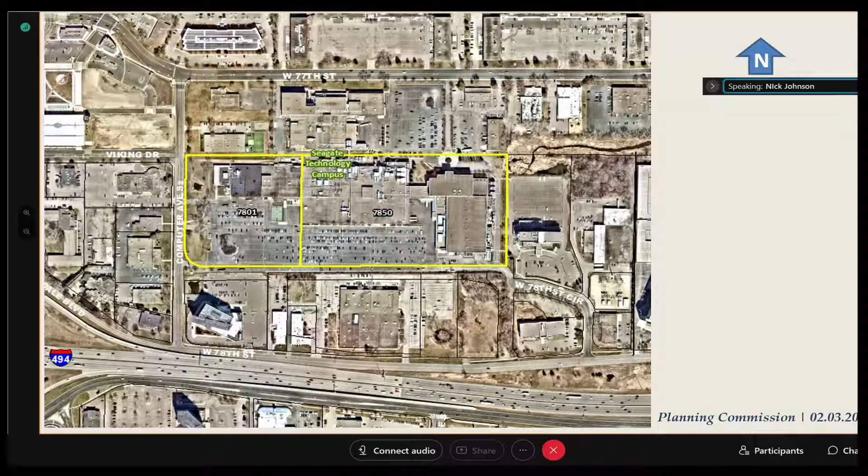For those unfamiliar with the Seagate campus, it's located just east of Highway 100 and north of 494, in that sliver of Bloomington that abuts Edina. In fact, the Seagate facility is partially within the jurisdiction of Bloomington, and the north part of the facility is in the jurisdiction of Edina. So that always presents an interesting, unique aspect to this project, or to this campus.

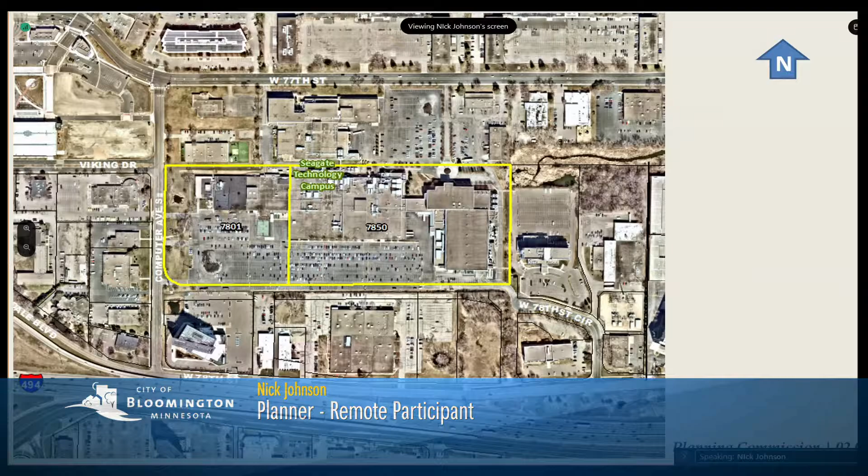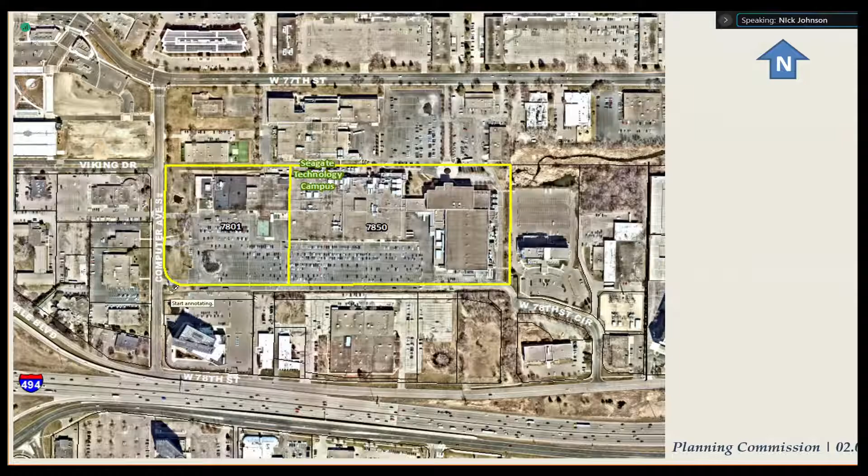Generally speaking, the access and all of the main transportation that serves this campus would remain the same. There is one thing I want to point out: a partially improved right-of-way that stretches from West 78th Street Circle over to Computer Avenue, which we'll talk about more. Generally speaking, the uses in this area are a mix of office, and we just had the high density motor vehicle sales facility in this area, so you're familiar with the area from that recent application.

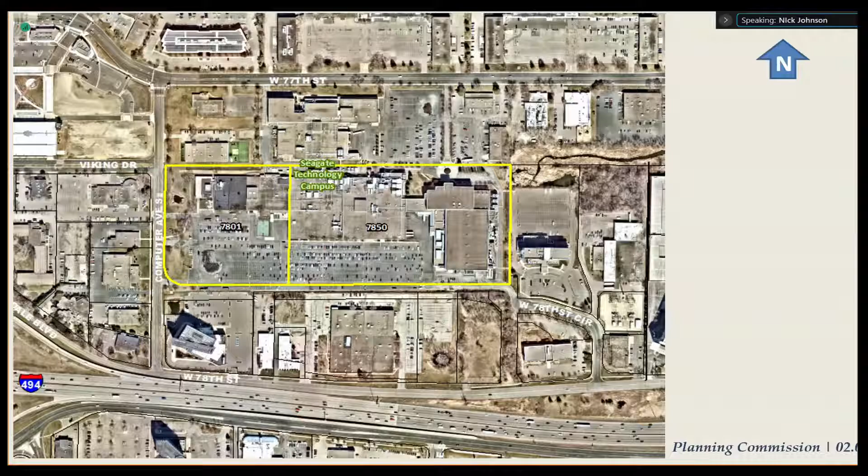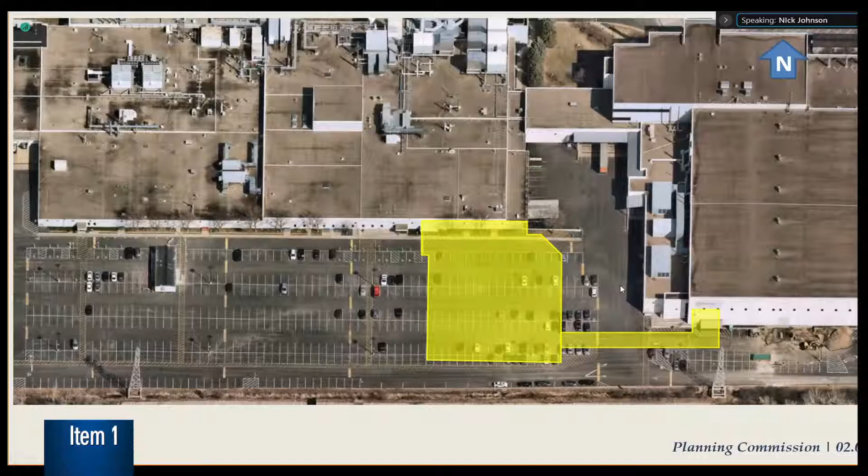This gets an oblique image here, closer into the campus, to give you a flavor. It's a mix of 1-story and 2-story buildings in this area. The shaded yellow area is where they would remove surface parking in order to install this building addition, and you see the skyway connection over to the east. Underneath here is a truck dock or truck court where they do delivery of various materials and shipping, and they would still allow access to that via the Skyway.

Here's the site plan before you. As mentioned, access to the facilities is primarily served to the west, out to Computer Avenue. I highlighted the building addition in green there. Some of the other associated site improvements include lighting and landscaping, and some of the typical things we would see with development.

In the orange areas, those are areas of either existing parking or modified parking, or in the case of this parking on the east side, new parking. As part of this project, they are installing some new parking but modifying existing parking in order to install underground stormwater management facilities on the west side of the campus. Their existing surface lot doesn't have parking islands and a few other things, so any area that they touch, they would bring up to code with respect to parking islands and those types of things.

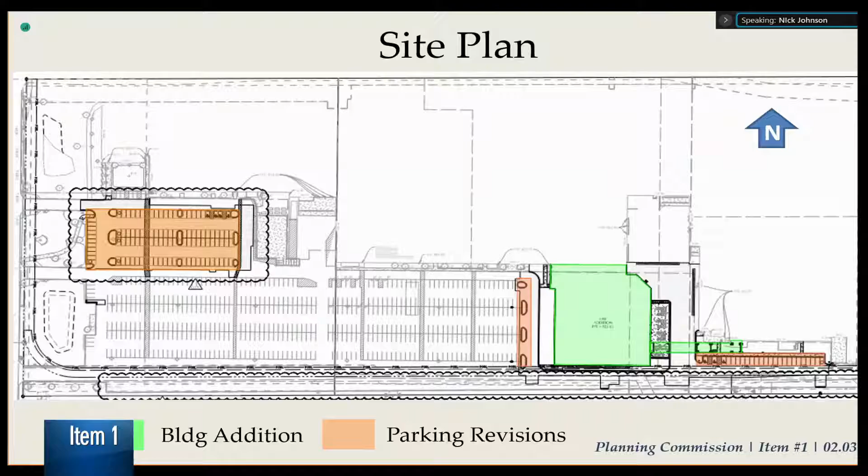A couple other things I'll note about the staff report quickly. The addition meets all of our setback requirements in the IT zoning district. They are requesting a modest deviation for stairs and stoops on the south side of the building. There are allowances for stairs and stoops to encroach into setback areas, but not within landscape yards, so I want to point out that modest PD flexibility they're requesting just on the south side of the building for stairs and landings.

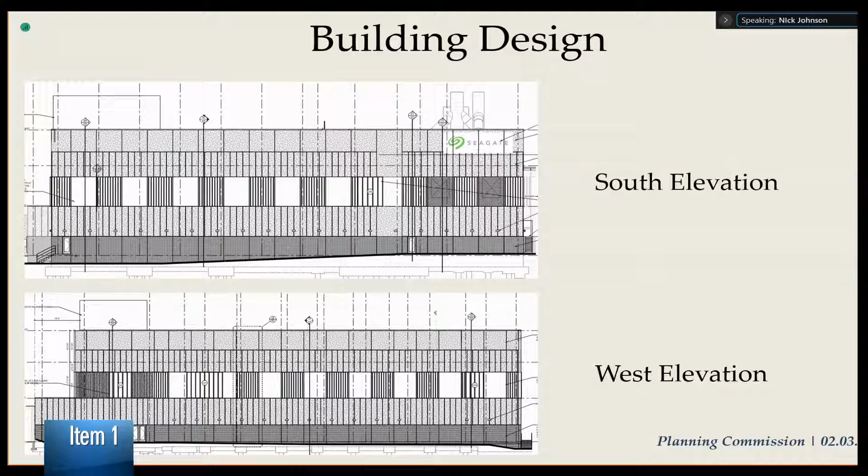In terms of what the building would look like, it's intended to match or mirror other portions of the campus. They've got glass and architectural concrete that's integral in color, kind of an etched or sandblasted type finish, and then some metal panels utilized at different portions of the building as well.

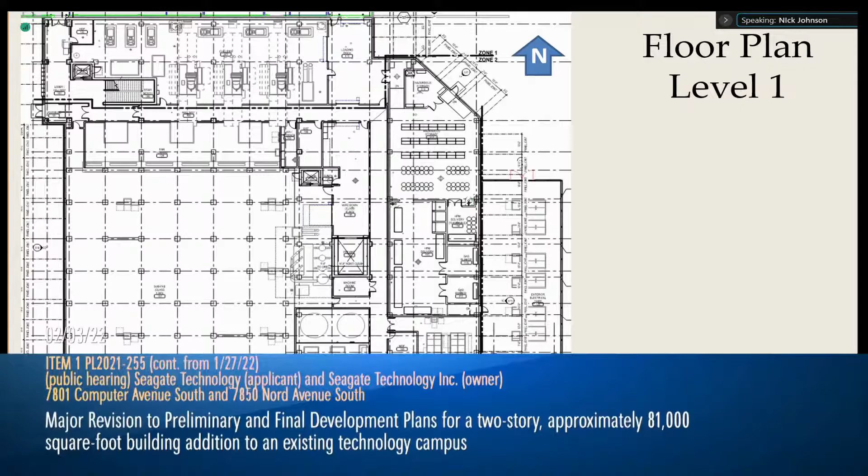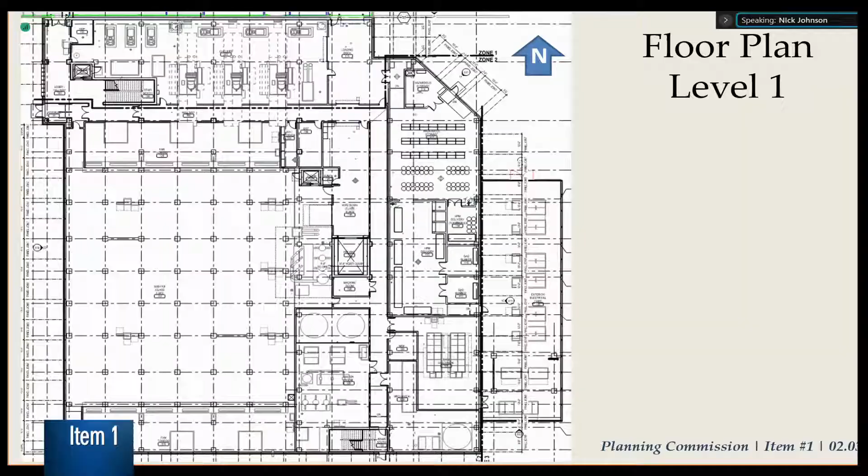Seagate is not a typical industrial or manufacturing use - it's a high-tech manufacturer in terms of chips and other things, so they have a lot of unoccupied space within this building. There's a substantial amount of mechanical, chiller, and air ventilation areas and equipment that creates a lot of dead space. That's something we've seen in other similar campuses - we have a few other comparable type uses in Bloomington over in the South Loop, and this is very similar to those facilities, which have lower occupancy than a typical manufacturing use. So that gives you a flavor of the first floor.

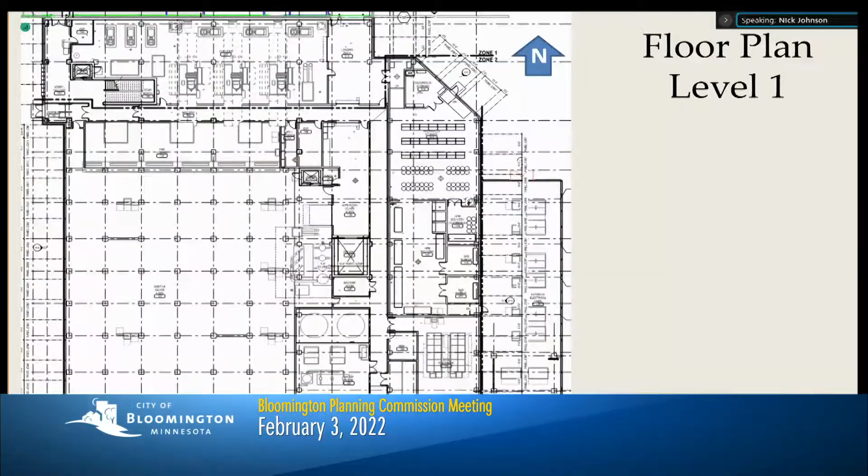The second floor, the area that's hatched on the left in the building addition, is actually the fabrication area where the fabrication activities would take place. But again, you have a lot of mechanical areas and a locker room. The fabrication area has to be a completely clean and controlled environment. On the right side of the slide, you see the Skyway connection - they actually have clean and dirty corridors, as they refer to them, so you can navigate in between controlled environments in other parts of the building.

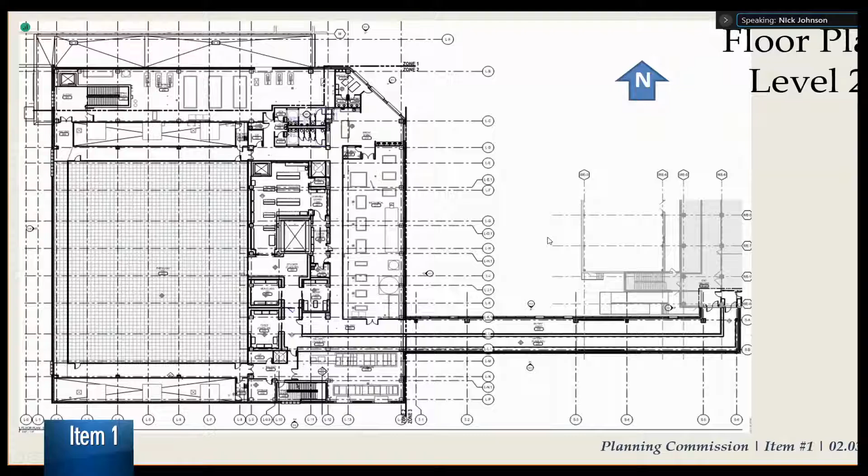I just want to point some of that out, and we'll talk about how that relates to the request as it pertains to parking. Let's talk about it right now.

The city code - first of all, on the basis that this facility is partially in Bloomington and partially in Edina, we had to work with the applicant to identify all the parking requirements in the jurisdiction of Edina. So they did go about that, and we verified those numbers. The calculations in the table I'll bring up on the next slide actually reflect both the parking requirements of the city of Edina and the city of Bloomington, getting us to an overall parking requirement.

They're proposing to provide around 1,400 some parking stalls, with consideration of 170 net proof of parking stalls. Along the eastern boundary of the campus, they're showing surface parking all along that drive aisle, and in addition they're showing expansions of parking in their existing surface parking lot south of the building through proof of parking as well. There are a few miscellaneous proof of parking areas also shown throughout the campus, so it's important to identify that they have a substantial amount of proof of parking that they're proposing to record against their property.

As long as I'm on this slide, I'll also point out that there's currently 93 parking stalls within that partial right-of-way on the south side of the campus.

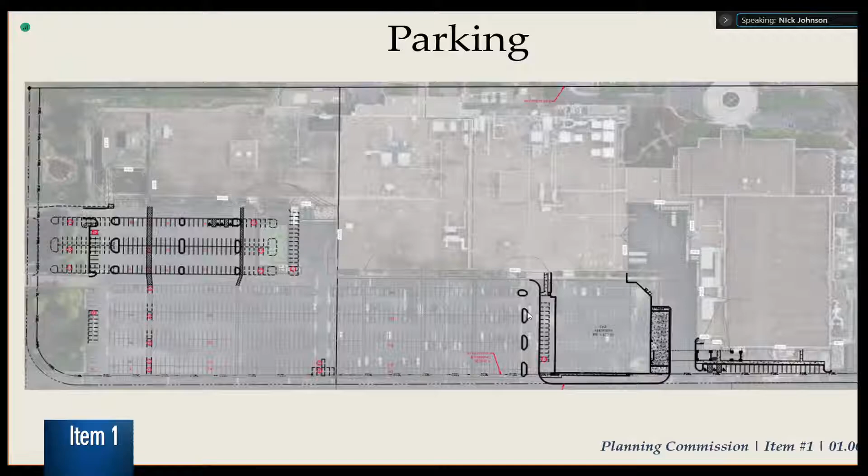That being said, this backup parking supply, while it can't count toward Seagate's formal parking supply for purposes of development approvals, is a consideration for how the city looks at requests for flexibility, or what the actual raw parking supply is that serves this campus.

Getting to the compliance table, you can see in combination with the 170 proof of parking stalls and the actual parking that's at the campus today, they would be requesting a 9.3% deviation from the city's parking requirement.

Staff is supportive of that for a couple of reasons. One, I mentioned the backup parking supply in the right-of-way that's likely to remain for an extended period, and has the potential to remain for a very long period. But the most important factor has to do with our experience with comparable facilities in the community — this facility has significant mechanical, air ventilation, and unoccupied spaces, as I mentioned before. So it's not a typical manufacturing use in that regard.

It also has a lower employee count relative to all of those spaces than a typical manufacturing use. For example, in the Seagate materials, they mentioned they'd have 45 employees per shift in the new building addition. If this were a typical manufacturing use, according to Bloomington's gross parking requirements, this new space would require 120 parking spaces for an addition that's staffed by 45 employees per shift. That gives you an idea of how the city's gross parking requirements don't mirror well this unique facility.

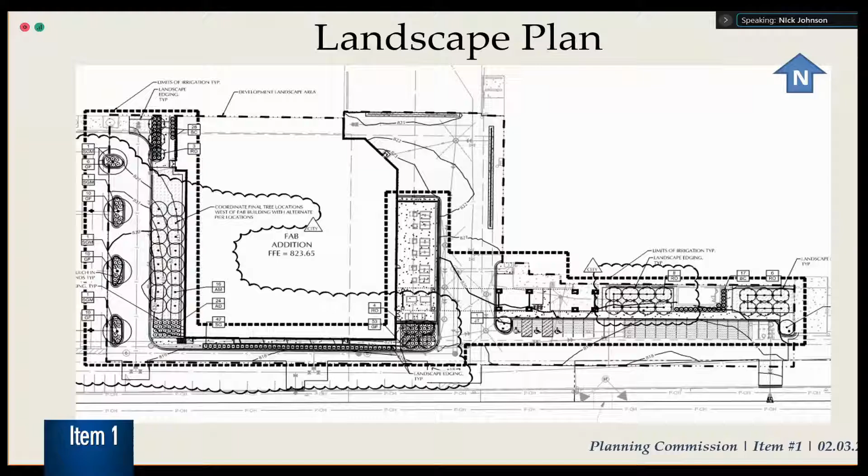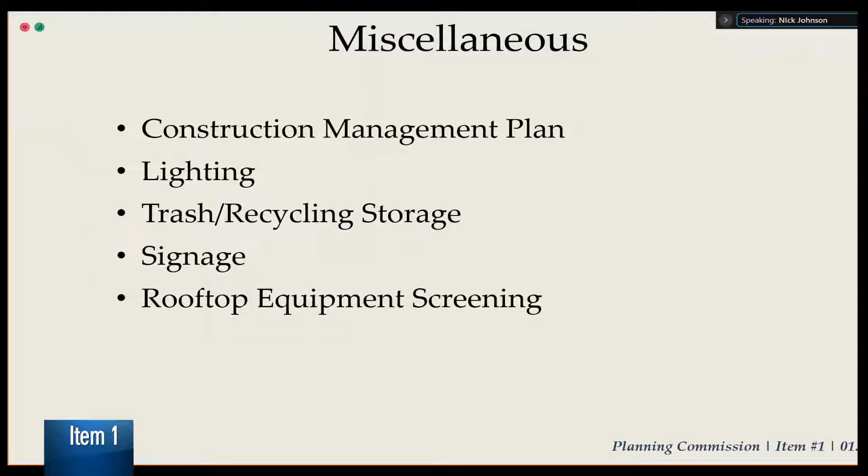Those things do need to be screened. We usually touch on that with the landscaping. There are some other miscellaneous things that have to be resolved as part of that application, and staff has added conditions of approval that address all these things. Hopefully it's straightforward. If there's any questions about a specific thing, I'm happy to return to it. But other than that, we have not received any public correspondence about this application, just to note that for the record. Staff is recommending approval, and I believe Seagate's staff, as well as their architect and engineer, are also available for questions.

All right, thank you, Mr. Johnson. Commissioners, any questions for Mr. Johnson on this application? Not seeing any right off the bat. Doesn't mean we can't ask later.

Mr. Markegard, is the applicant online? Yes, Mr. Chair, we have Mr. Leppert and his team as well. Mr. Leppert, are you there? Yes, Martin Leppert, Facilities Engineering Manager for Seagate. Would you like to address the Planning Commission in any way on the application? No, I have nothing to add. I think Nick did a great job explaining it.

All right, Commission members, anything to ask of Mr. Leppert? I'm not seeing anything for you now, Mr. Leppert. Appreciate you being available for any questions we may have. Thank you. At this point, commission members will go ahead and continue the public hearing on this item.

Mr. Markegard, is there anybody online that would like to speak to this item? Sure, Mr. Chair, let's check in with Mr. Pease and see if anybody has called in. Mr. Pease, do you have anybody on the line? Mr. Pease, can you hear us? I've got a text, he says no callers online. Okay, all right, and just to verify, anybody in the room that would like to speak to that item?

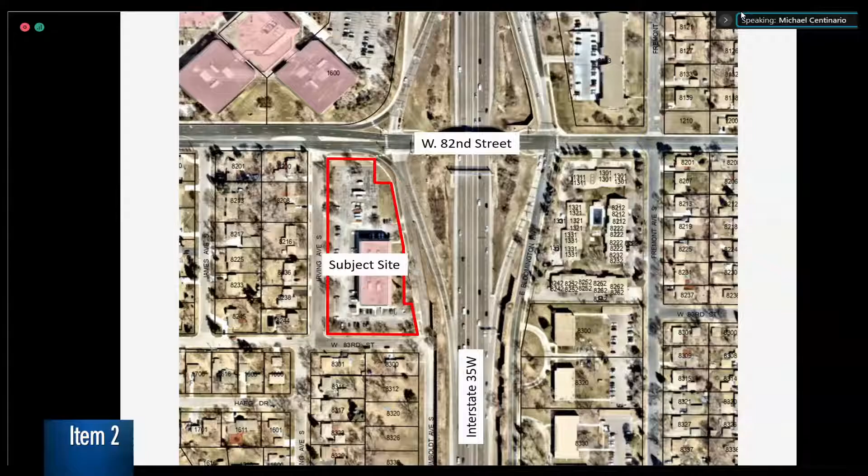A couple images of the existing conditions: the office building is about 50 years old, built in 1972, a 3-story office building with one level of structured parking beneath. It's largely surrounded by surface parking to the north, west, and south. I consider it fairly typical of this era of office development. This is an image from West 82nd Street looking south towards the building, showing its relationship to the interstate. Humboldt Avenue is the local street straight ahead in the image, and the on-ramp is to the left.

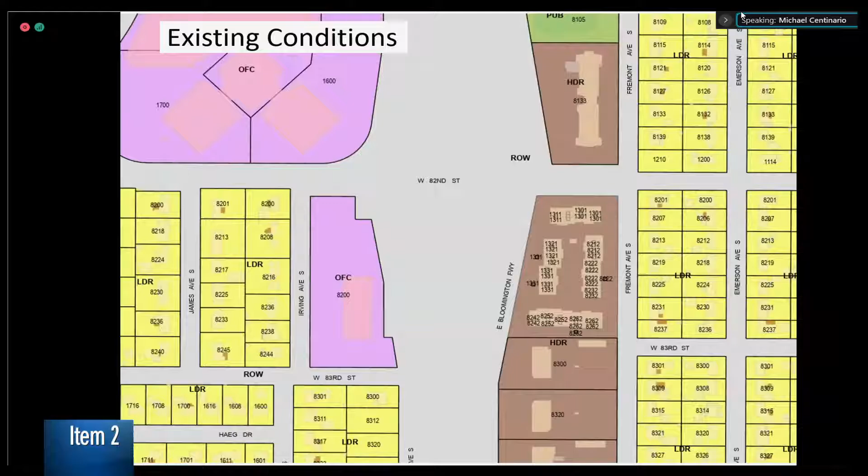The existing land use designation is office, very much in keeping with an office use. But to accommodate a multifamily or high density multifamily development, that would need to be changed to high density residential. You don't have to look very far to find high density residential designations — just on the east side of the interstate there are high density residential properties, some condos directly to the east, and apartment development to the north and south. So included in your packet is the re-guiding to high density residential.

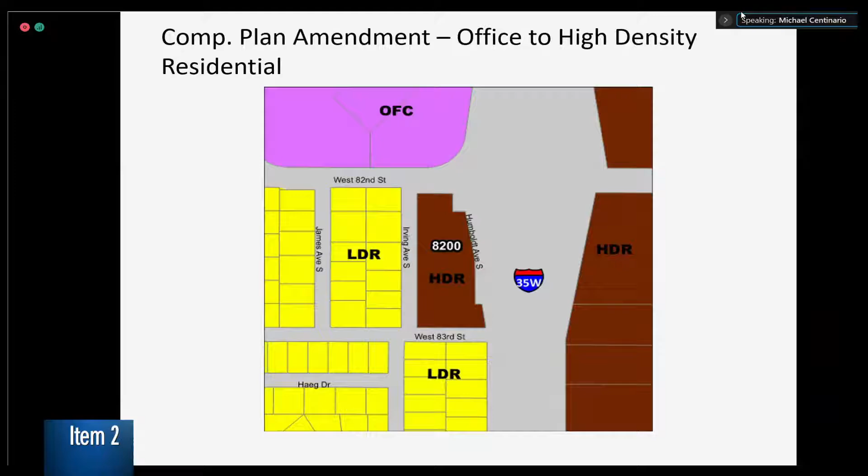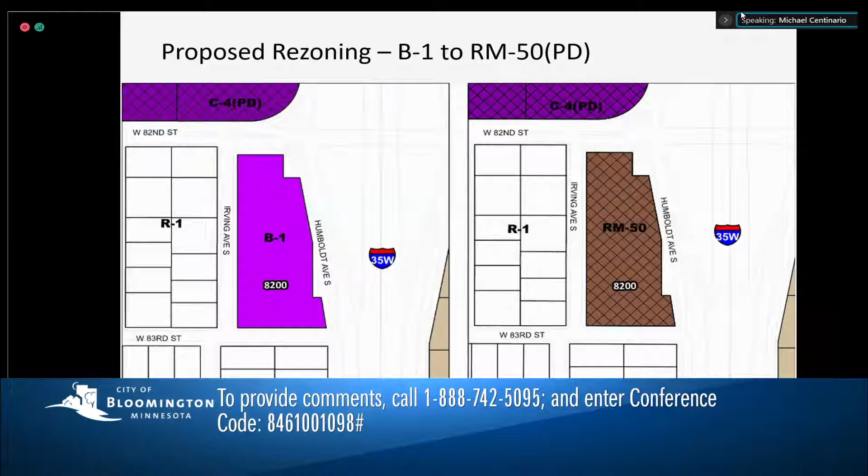Along with the guidance change, there would be a rezoning, and staff are supportive of the comprehensive plan amendment and the rezoning. We feel this meets the policy objectives outlined in the comprehensive plan and detailed in the staff report. Although this site isn't strictly within the Penn American District Plan, it's right across the street from that boundary, which creates an opportunity for folks to use transit access to the Orange Line — it's within walking distance to those stations. That's a factor in considering the rezoning and land use designation change.

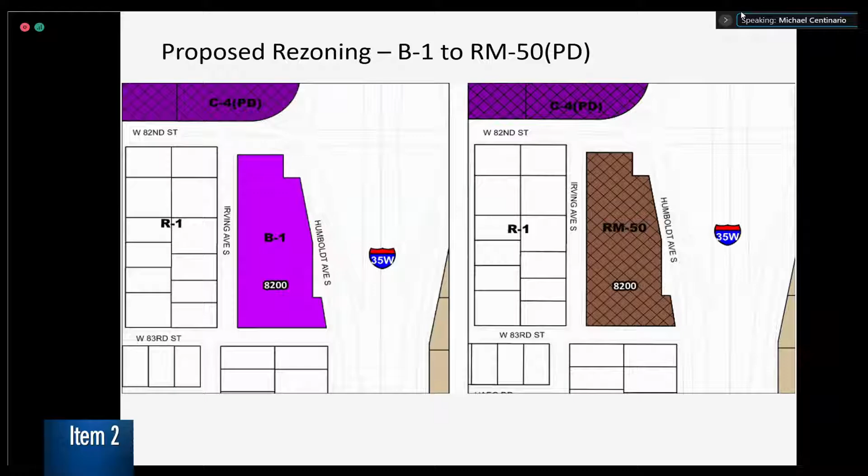Going to the site plan: 149 units, with a unit mix pretty typical for what we see. The majority are studio alcoves or one bedrooms, a good chunk of 2-bedroom units, and then 7 3-bedroom units, a smaller proportion.

The affordable housing ordinance, or opportunity housing ordinance, is applicable here, so there is an affordability requirement: 9% of units affordable to those earning up to 60% of area median income. The applicant is proposing a higher level of affordability — 14 units at 50% area median income. They are seeking tax increment financing through a separate process, and the level of affordability might evolve, as the applicant may seek a different tax increment financing mechanism and offer additional affordability. I don't believe this will be the last time the Planning Commission reviews this project in some form, but what's being presented tonight exceeds the OHO requirements as outlined in City Code.

With redevelopment, there is very often some flexibility requested by the applicant to fit a modern development on a not-so-modern site. This site is particularly difficult because it's surrounded by public right-of-way on all 4 sides, and our zoning setback requirements are usually fairly significant along streets. In order to have the density required to make this project work financially, they are proposing to locate the building closer to Irving Avenue than City Code would allow.

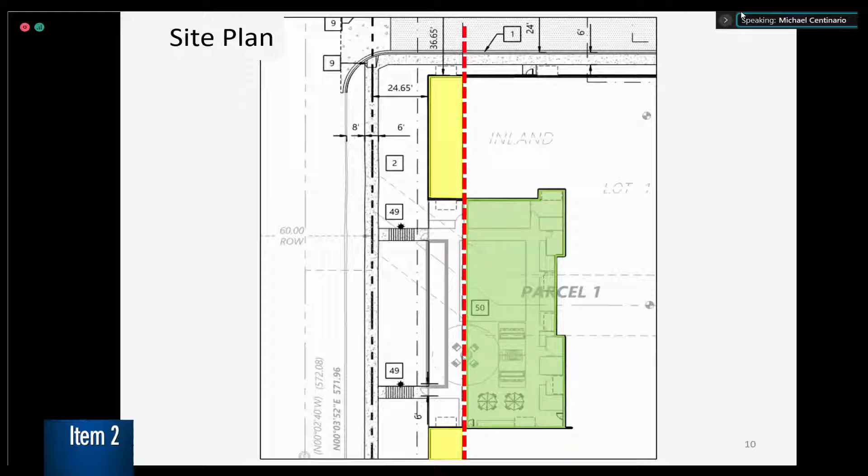One reason there was a bit of a delay in bringing this application before you is, again, right-of-way on all 4 sides, and there is some grade between this site and Interstate 35W to the east. So some retaining structures would be required to allow for surface parking. The retaining wall we felt needed to be adjusted to ensure there weren't impacts to MnDOT right of way, which would certainly lengthen the review process and may not be approvable, frankly.

So the applicant adjusted their plans. We wanted to ensure the retaining wall was no greater than 4 feet, because there are different standards. Once it gets above 4 feet, it's required to meet structure setbacks, and again, that's 40 feet from the property line. So that's a pretty significant deviation.

This retaining wall, even though it does not exceed 4 feet, still requires a deviation because there is a 10-foot setback even for a low retaining wall. But frankly, some retaining wall is necessary — it's either have a retaining wall or reduce the surface parking substantially, which may not work for the development overall. So again, we are supportive, and appreciate the applicant's adjustments based on staff's comments.

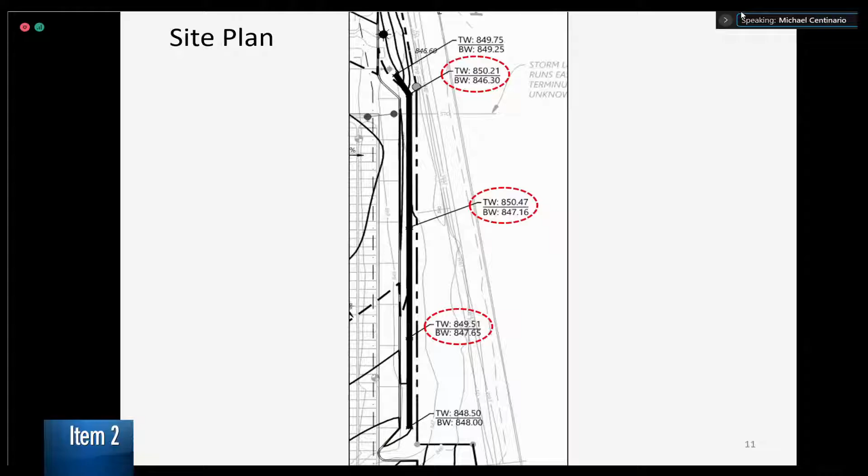Again, once you move one lever, something else changes — when the applicant was adjusting the retaining wall and the parking lot, they narrowed the sidewalk width a little bit. So one adjustment that would be a code requirement, and we are suggesting has to take place, is to maintain a minimum of 5 feet clear for a sidewalk. You can see a 6-foot dimension there. So you might ask, well, why does it need to change?

We want all parking stalls along sidewalks to account for vehicle overhang, and the standard we use is 2 feet. So to account for vehicle overhang but still maintain a clear walking width of 5 feet, we want to see a 7-foot wide space. So a little bit more work is needed here. We're supportive of a variety of solutions — maybe reducing the drive lane by a foot, or potentially reducing the parallel stalls by a foot. I'm not sure if 10 feet is the minimum requirement, or making some other minor adjustments to allow the code to be met related to sidewalks.

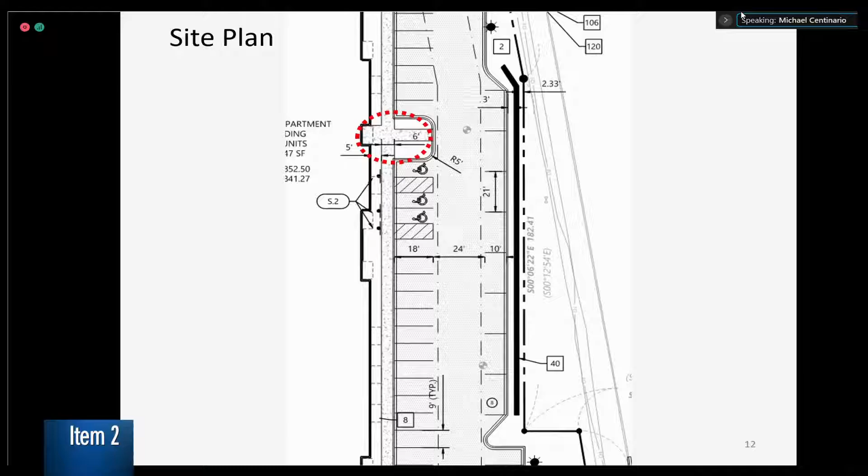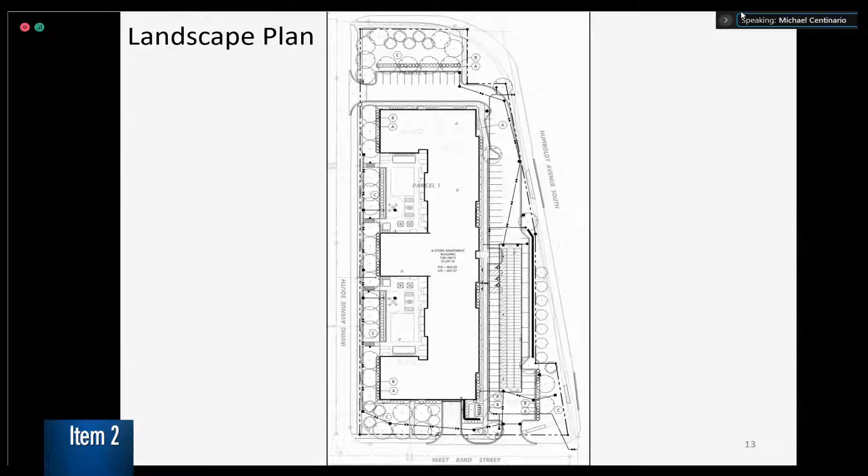We did not receive the Department of Transportation comments in time for the packet, but one thing they commented on was that some trees are shown in MnDOT right of way, which they identified would have to change. So that's a minor modification that would have to happen as part of the revisions to the landscape plan. But we think that's a pretty simple revision.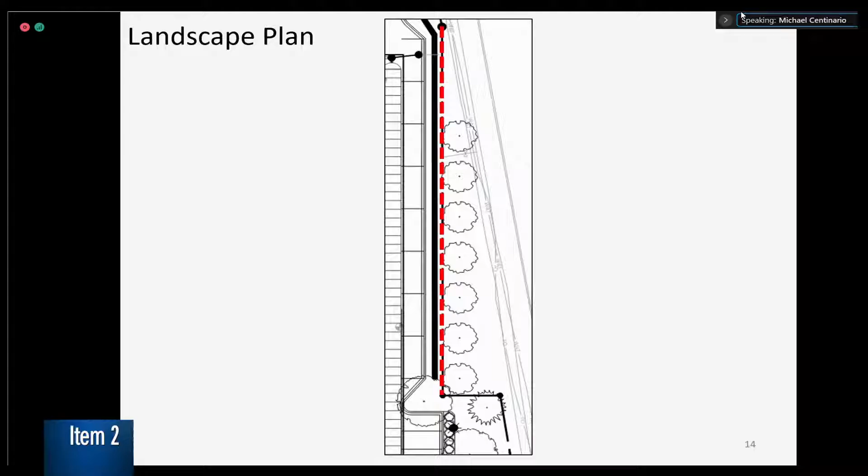Going to parking, again, so with every major development project, we calculate the parking based on the characteristics of the development, and each unit type has a different ratio. The total parking requirement baseline is 298 stalls. However, there are incentives that apply, and with the incentive applied, the parking requirement becomes 209 stalls.

So the 224 stalls being proposed exceed the parking requirement when the OHO incentive is applied. Regardless, before we went through this most recent iteration of the development, a parking and traffic study was completed. The numbers were a little bit different, but similar ratio of stalls per unit, and the study found that there would be more than adequate parking.

The mix of materials are pretty similar to what you've seen before. A lot of brick facing the street, which is of course a permitted material, and then a combination of glass, metal panels, and fiber cement panels. So they do get to take advantage of some incentives related to materials. The OHO has some allowances, but again, because this development is along streets, it doesn't give them a lot of flexibility because the incentive does not apply to street-facing facades. So the majority of this development will be code complying, given the limited incentive.

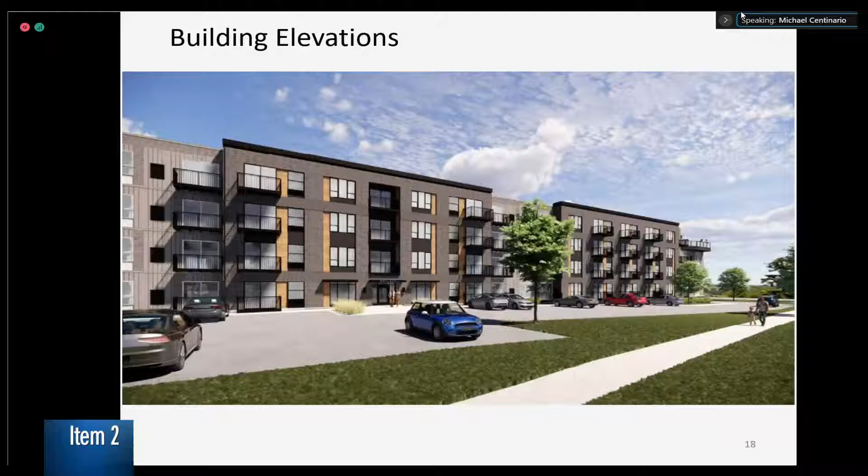Another image, this is from the northeast corner of the site. You can see a small club room on the top level, and then along the east — this 3-dimensional image would need to be adjusted. The Mini Cooper in the foreground would become a parallel stall. So it's just a rendering change, but you can see the east side of the building is at grade, so the surface parking is at grade.

But with that, we are recommending approval. And because of the applications before you, there are 3 motions. One is for the comprehensive plan amendment to re-guide from office to high density residential. There's the corresponding rezoning from neighborhood office to high density residential, and then a motion to recommend approval for the preliminary development plans. I believe the applicant is here with us tonight, but I'm happy to answer any questions.

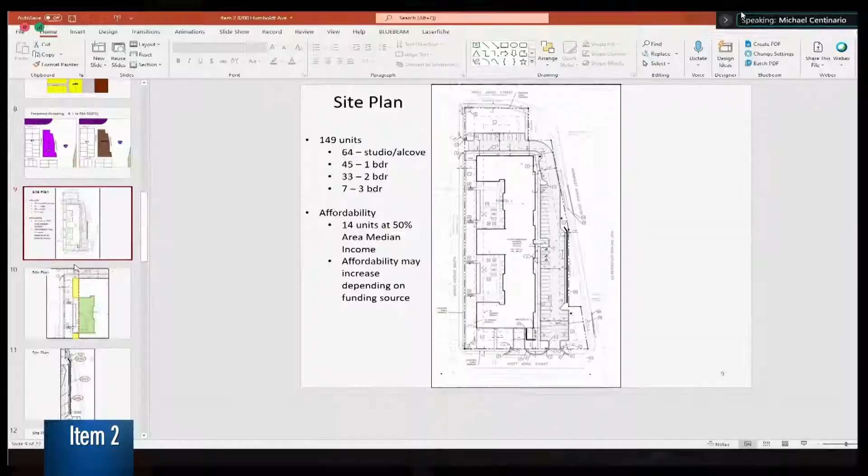Certainly. So we do — excuse me — we do want there to be snow storage, given we live in Minnesota. We don't have detailed performance standards on what that necessarily looks like on a site-to-site basis, but it is a factor on our site plan review. So we generally look for spaces where snow storage could be located, essentially relatively open areas where a plow could just push snow.

Given that MnDOT isn't going to want snow in their right of way, it would need to be identified or stored on site. The two most obvious areas are the green space to the north of the site — that's a pretty substantial green space, and without park improvements or landscaping there wouldn't be an obstruction to keep snow from being stored there — and then the southeast corner, where there's another open space where snow could be stored. So the parking facility isn't tremendous, and generally speaking we were comfortable with the spaces that would be made available for snow storage.

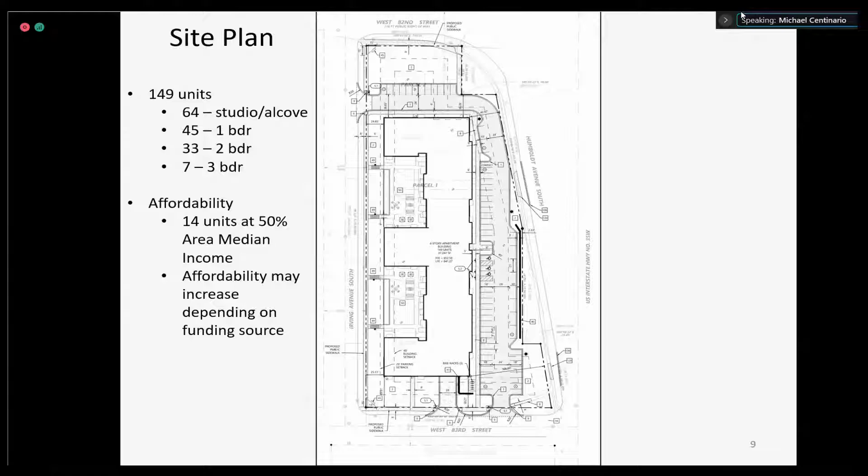Thank you. Okay, any other commissioners with questions for staff? Not seeing any. We'll go ahead, staff.

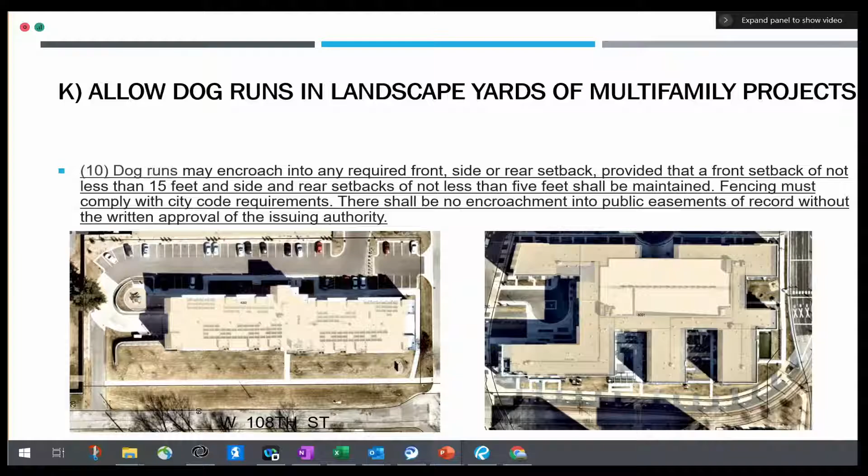Okay, item J. This is an interesting one that just came up. I think Londell caught this, where we have this definition of private stables for horses, and you're allowed a maximum of 4 horses in your private stable, but the stable can be 6,000 square feet. We traced it back, and at some point it used to be 600 square feet, I think in the 50s we found a code that said 600 square feet. So we think at some point a comma and a zero were added, and it just kind of stuck there.

Obviously this isn't one that comes up very often, but just one of those clarifications. Any issues with this? Seems like a good fit. And I did double check, 600 square feet is enough for 4 horses. They typically have a 10 by 10 or 10 by 12 stall, so it works.

So as a follow-up, sorry to interrupt. Just to understand what this means: in Bloomington, if you have a property that allows for this size stable, you technically could have up to 4 horses, but are there other requirements for having a horse in Bloomington? I'm just trying to get my head wrapped around having a horse in Bloomington. Yeah, we do have a whole bunch of animal code requirements for what the stable requirements are, and there are a whole bunch of other requirements as well.

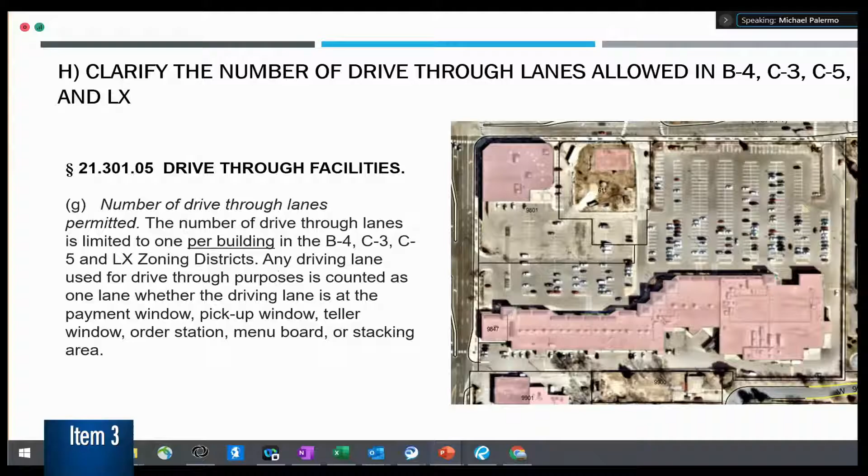Does that answer everyone's questions? Okay, this is one I believe you had encountered recently. We do have some properties that are not platted with our block and lot style. We typically do require with additions or certain permits to come into conformance and plat properties. But we do have some examples here where you don't have to come into conformance with that platting requirement. We thought it would also make sense for small additions, under 1,000 square feet, to incorporate that into that exemption as well. So less impactful. You still need final site and building plans approved by the planning manager, and it fits into how we handle some of these other exemptions.

Any questions on this? Nope. This is another one where it's more on interpretation. We want to clarify that circular driveways—right now our circular driveway language is nested in our second curb cut language. Some, like this top left example, is where you would have a second curb cut, but these other ones are examples where you have a circular driveway that comes in on itself. So it makes sense to create its own little section, acknowledging that not all circular driveways require a second curb cut. But the more important part is also that the main part of the driveway can be wider, but on that secondary part where it loops back, it needs to be limited to 12 feet. So this is something in the code now, but it gets lost because of that second curb cut discussion.

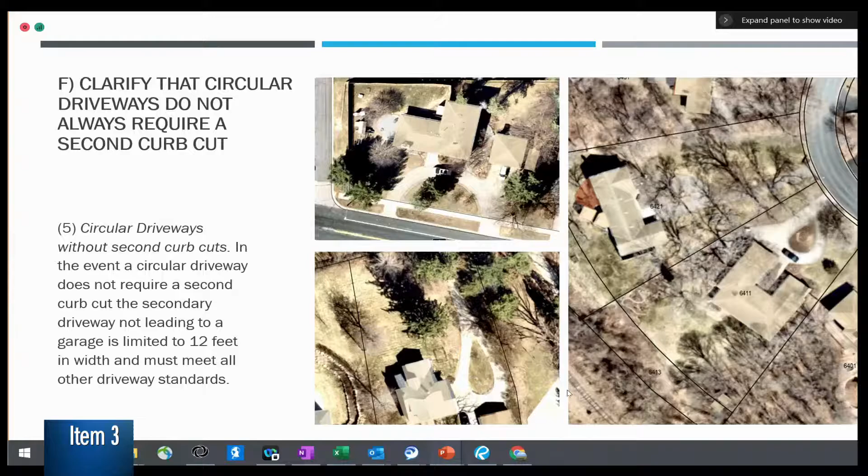Any other comments? This one we have in our use table. We call out in this section that daycare facilities are permitted as an accessory use in our industrial zoning districts. It is accessory in all the zoning districts except FD2, which was a conditional use. So this would just be adding the language 'conditional use' in there to clarify that accessory or conditional use doesn't change how we apply it.

So as you can see, these are getting a little bit easier. This is another one, the clear view triangle. We talk about it in multiple spots in the code, and it's consistent throughout the code, but we don't have a single spot where we define it. In fact, this graphic is in our sign section. It just makes sense to have it rooted somewhere in our definition section. So this definition is kind of what's found throughout the code. Having that in the definition section clarifies something to point to and easily define. So nothing new here, but just adding that to the definitions.